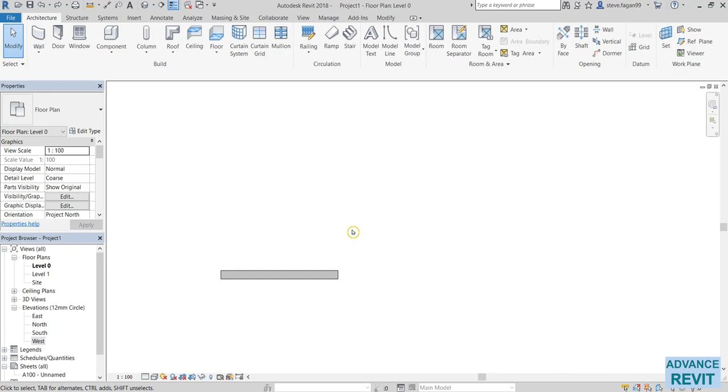To zoom, we'll just scroll the wheel in and out, in and out. If we zoom out too far, just double click on the wheel and that will zoom extend, so everything will be centralized. If we go over to our 3D view, up in the quick access, we'll select the default 3D view.

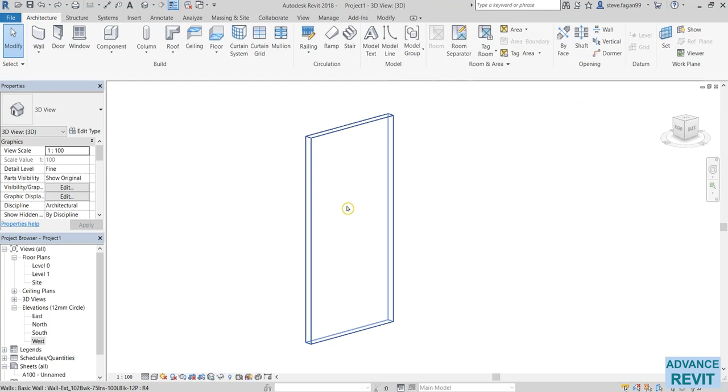To navigate a 3D view, it's the same. We'll click and hold in the wheel. As well, we can scroll the wheel to zoom in and out. In order to orbit the view, we need to hold in Shift, hold in the scroll wheel, and then we can move the cursor to orbit around an object.

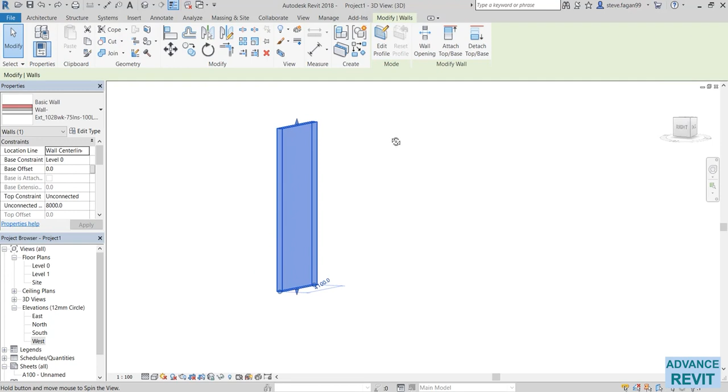To make the object centralized when we orbit, if we select it and then orbit. In the top right, we have the view cube, which is another way that we can navigate the view. So we can either click and select the view cube itself, or we can also rotate the view as well.

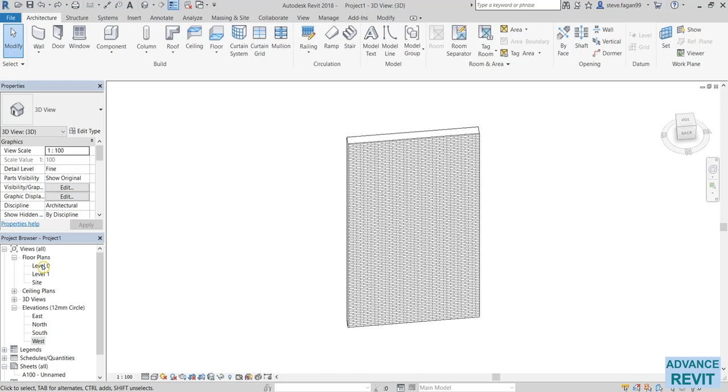I'll go back now to my level 0. And I will just create a couple of additional walls.

So we have two selection methods. We have our window selection and a crossing selection. A window selection, if you start from the top left, click and hold in the mouse, and if I drag my cursor over, we've just created our window selection. So you can see it's a solid gray line.

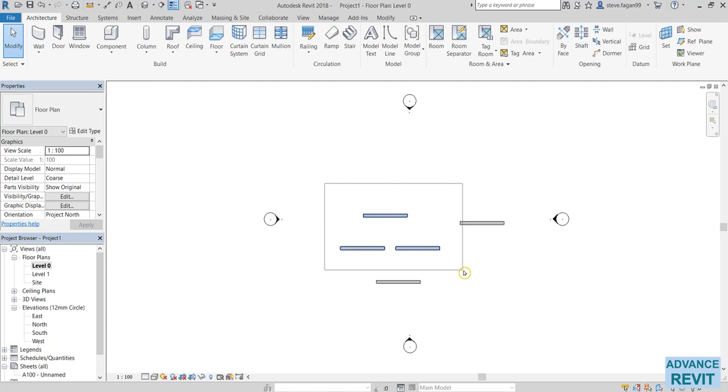So if I wanted to select this wall, the wall only becomes selected once it's entirely inside my selection window. Same with the other walls. You can see that they don't become highlighted in blue until they're entirely inside the window. And press escape to deselect.

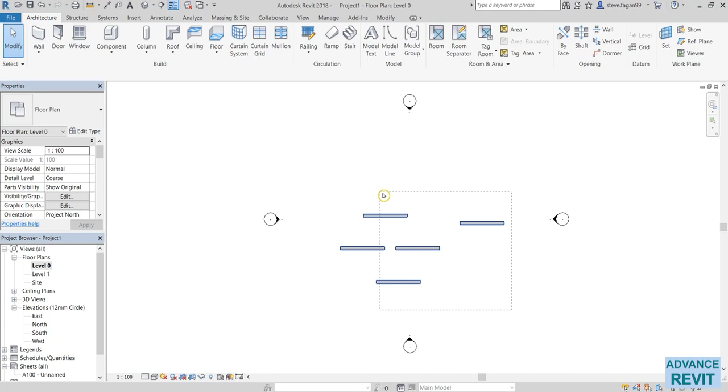The second selection method is called a crossing selection. So get into the bottom right hand corner, moving up to the top left. The difference between the two is the object just needs to touch the crossing window to become selected. So with the window selection, the object must be entirely inside the window, and with the crossing selection, the object only needs to touch off the crossing selection.